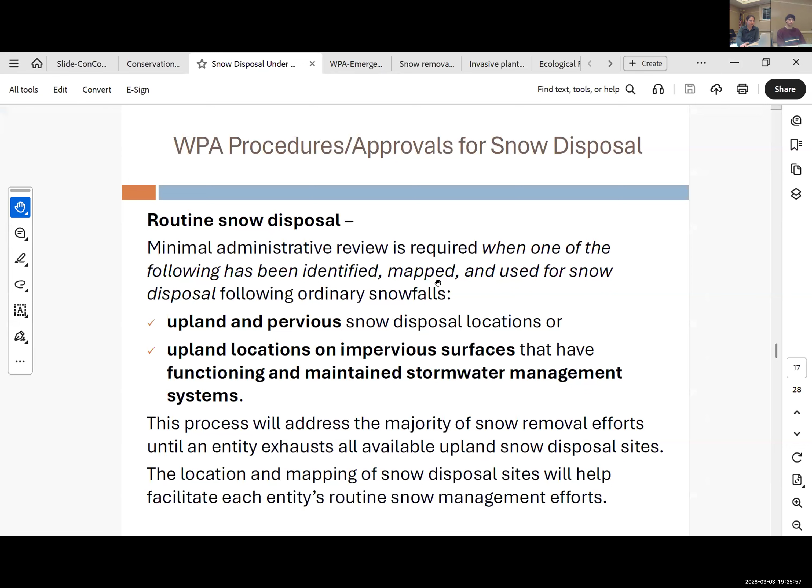Just for administrative awareness, I shared this in OpenGov, but I'm happy to share it via email to the commissioners going forward. DEP does have guidance about emergency certifications, specifically for snow removal. I think Kim and Andy just hit most of the points—basically exhausting upland storage and ensuring the snow is of the highest quality possible. The planning office intends to have the kinds of things we're discussing now written down, so the commission would have questions and answers, and facts, to refer to when making decisions. That document would be an attachment to the emergency certificate, updated as a living document going forward.

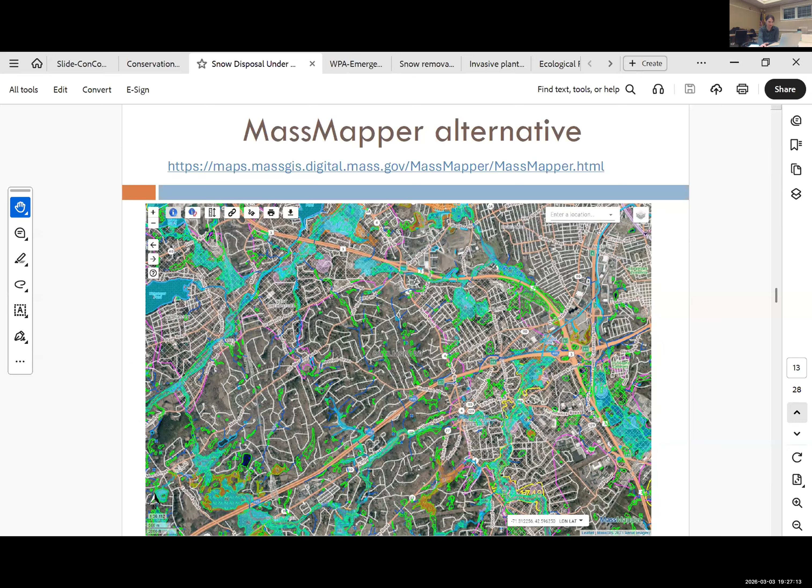Kim, one thing I forgot to ask you about earlier: I know DEP had brought up the issue of maybe needing an endangered species emergency authorization, or at least checking in with Mass Wildlife. Is there any update on that? I don't have an update tonight. My understanding from our initial back-and-forth emails was that there were no endangered species in that area, so it wasn't something I pursued further, but I'm happy to do that going forward.

I'm sorry, it didn't cross my mind until this evening when I was looking through some of this guidance, but I think that will be something we'll include in that ready-to-go package.

There are sturgeon up around there. I think in the future the process will include getting a sign off from Mass Wildlife of some kind, even if it's not strictly a MESA review, just kind of an awareness. That was something I forgot to bring up earlier today.

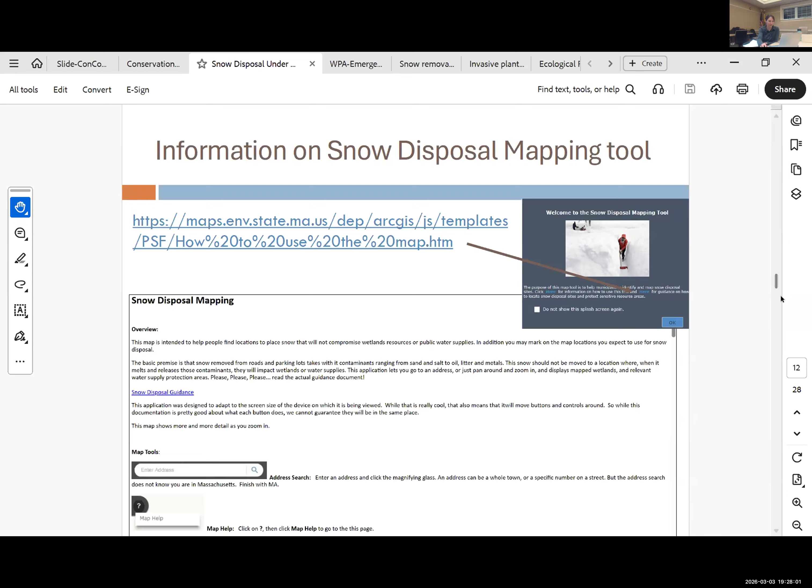So this section D is a standard state form for commissioners who haven't maybe seen this process before. The special conditions go here. What's happening is in my absence, Andy signed this certification form because I was away and because of the time urgency. It's valid only if the commission ratifies it, which is a simple majority vote. Once it's ratified, it's in effect for 30 days. In this case, the emergency is over, so it's definitely within that 30-day window for now. If 30 days passes and another snow emergency came up, hopefully not, it would require a new certificate. It's not like this lasts all season, it has a 30-day expiration date.

But the question before the commission now is whether you'd ratify this certification that was issued last week.

So I have one other question. Kim, is it in DPS's plans in the future to use that snow blower so that it's clean snow rather than scrapings, in future seasons? It's not a piece of machinery the city owns, it's something we contract out. But I know it worked really well this season with the sheer amount of snow we had, so I would imagine moving forward it would be something we'd be interested in contracting again.

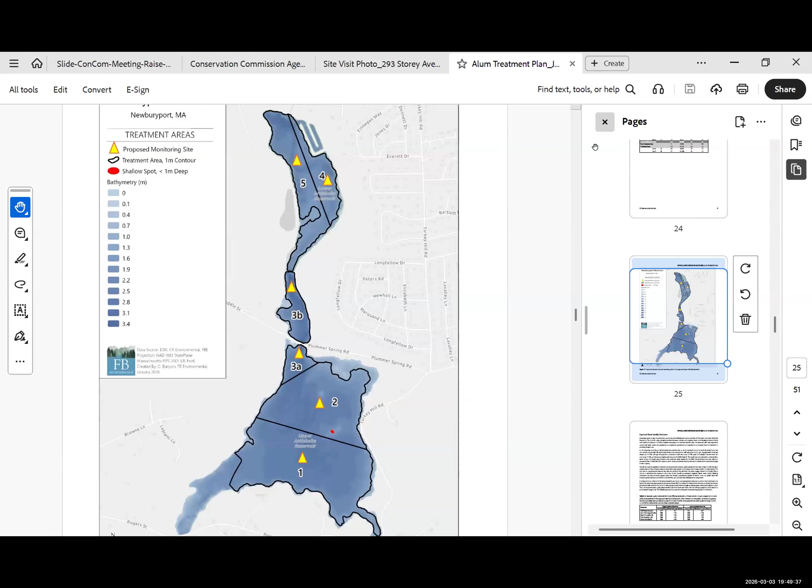Just to give you a sense of how we're planning to break the treatment up: there are 5 primary zones. Zone 3 has 2 parts because it's above and below Plummer Spring Bridge, so we have section 3A and 3B. They'll be treated with the same dose, but there are some logistics being sorted out with barge access between those two zones.

The treatment itself will still need to be negotiated a bit with the contractor selected, as far as how many days it will proceed. My proposed plan aims to maintain ecological integrity while managing what can realistically be done by the contractor and the equipment they have. It'll likely be around 10 days of total treatment over a 2-week period, aiming for the first two weeks of May this year.

That timing is pretty critical because these are shallow reservoirs with fairly dense aquatic vegetation that grows, and we want to apply this before the plants really start to reestablish for the season. This allows for good floc formation as the compounds are added, and rapid settling into the sediments.

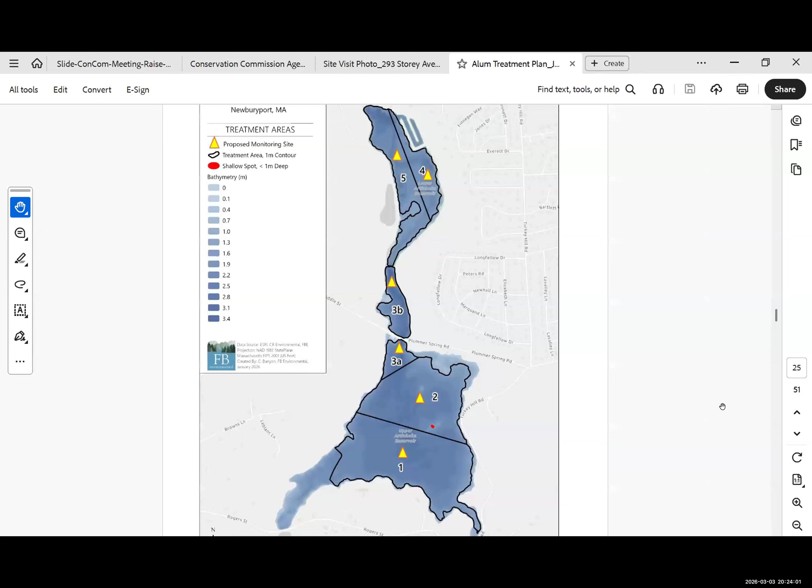So I lay out a fairly comprehensive monitoring plan in the plan, PDF page 36 Kelsey, since you're navigating to it. It's just a summary table. There's a narrative before that table that helps explain it. But in the map you saw earlier, there were yellow triangles on that map, and those are monitoring stations that will be utilized.

So we'll have a couple monitoring events before treatment, so we can establish a baseline at all of those sites. And then during the active treatment, which should occur over a 2-week period in May, city staff will be going out every morning to collect the parameters you see here. So it's basic water quality parameters.

The ones you see coded in pink are the ones that are directly affected because of the treatment itself, right? So the pH and turbidity, those are things that we're specifically looking for in the pH. We want to stay within a certain range during the active treatment.

So someone like myself, who's able to assess the safety of the treatment as proceeding, I will be out there making sure that the pH is maintaining itself during the treatment, and then we'll be collecting samples that are sent to a laboratory for the other parameters listed here, most especially the total aluminum, which we'll compare to EPA criteria, knowing that the first sample will likely exceed, but what we want to see is a very quick recovery of the system.

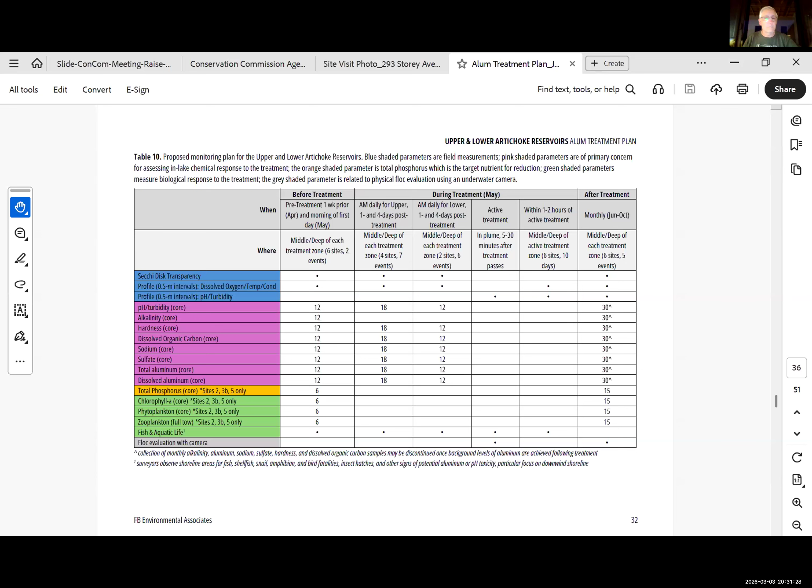All right, next item is 13 Hale Street, Sunil Shah, Palmer Capital Corp. Yeah, Joppa, they're both in the room here in person.

I'll hand it over quickly. I think several commission members have been to 13 Hale Street a month or two ago. They received an unrelated certificate of compliance. Now proposed is a battery energy storage system. We recently issued an RDA for a battery storage system at 23 Low Street. This is an unrelated project, but I bring that up because we have an idea of what the project looks like, and there are some wetlands on site, but I'll let you guys describe where that's going on, and I'll bring up the most recent site plan.

Thanks, Kelsey. Just to introduce myself, my name is Justine Fox. I'm a wetland scientist with Williams and Sparages LLC. We have Sunil Shah here as well from Palmer Corporation. I'll just wait till Kelsey gets the plan up.

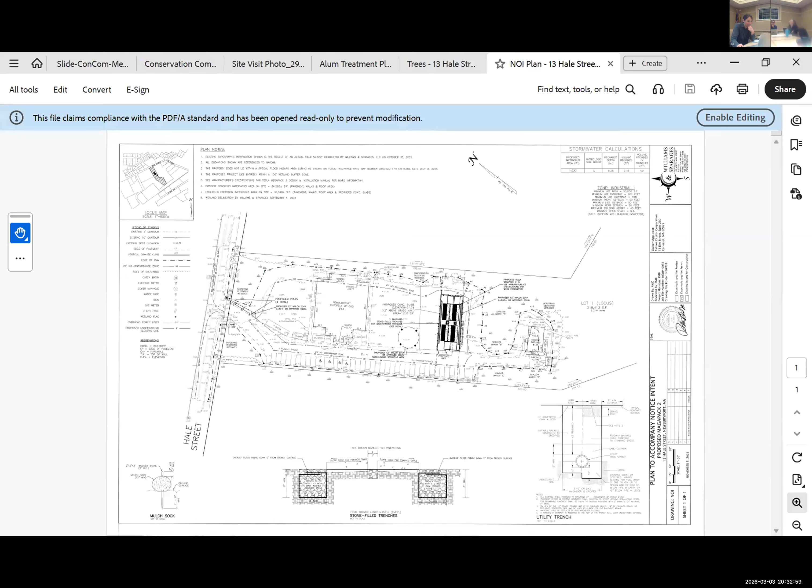Sure. So just to speak to the wetland resource areas in question, they pretty much surround the structures on this property. If you're familiar with site plans that were approved for this property in the past, there was not previously a wetland delineated on the western side of the property.

I did get some pretty obvious hydric soils in there, and looking at old plans from the site, that area was designed as a swale, so it makes sense that a wetland would have formed there over time as water moved towards the swale. There were also stormwater basins constructed that are labeled as shallow marsh B and shallow marsh A that have been delineated as wetland as part of this application. They've pretty much taken over with wetland vegetation at this point, which might be more obvious in the photos that Kelsey took at the prior site inspection.

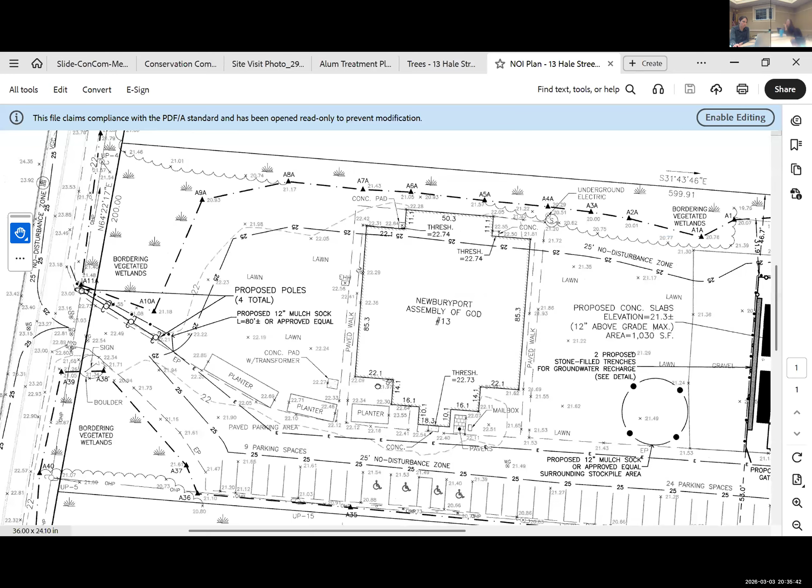No vegetation is proposed to be removed within the buffer zone for installation of the system. Underground electrical wires are proposed from the system, up the driveway in front of the church structure, and towards the entrance, where they will surface, and 4 new utility poles are proposed adjacent to the wetland resource areas near the entrance to the site before they join existing infrastructure in Hale Street.

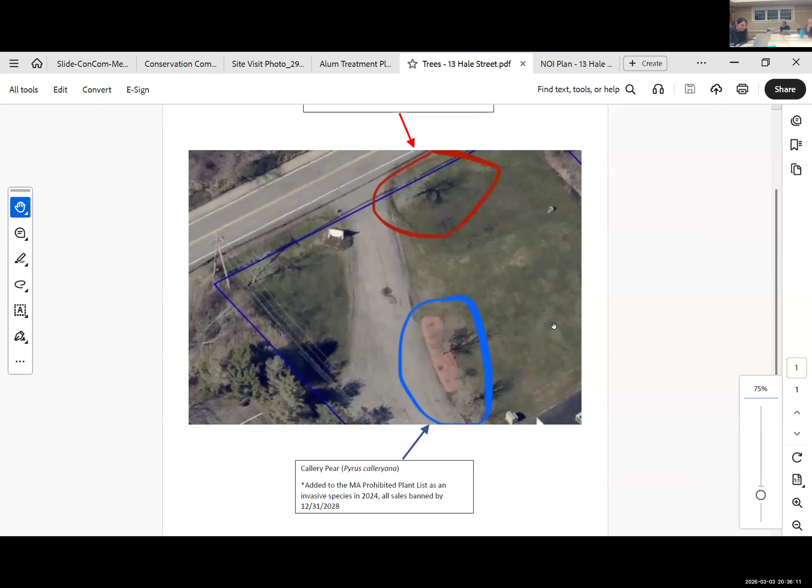The only vegetation we were potentially concerned about was a tree that I circled in red near the street. That's where the overhead wires will be, no longer underground, and potentially impacting the branches on that tree. I identified this tree as a green ash tree, and unfortunately there was evidence of the invasive emerald ash borer in the canopy already, which is typically fatal for this type of tree within a few years of initial infestation. So chances are this tree will continue to decline anyways, and that is the only wetland vegetation we would be concerned about potentially disrupting as part of this proposal.

So currently the electrical is underground? We're proposing underground electrical coming from the system, and then there's existing infrastructure above ground in Hale Street that it would be connecting to.

So currently going to the church, there are no poles. Or are there? There are poles on the west side of the property. You can kind of see it a little bit, right there. So why not use those poles? Those poles are not adequately sized, and the wires are not adequately sized. We need to tie into the wires in the street.

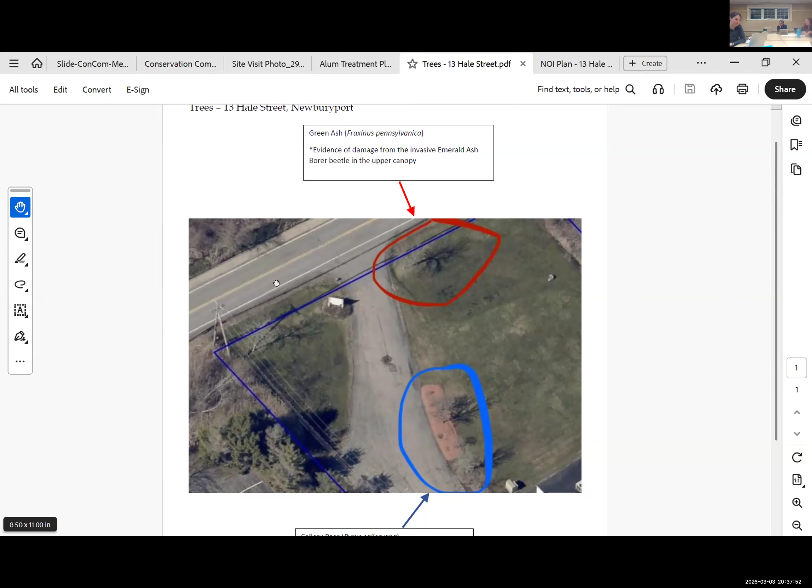As of this afternoon, we do have a DEP file number. And the planning board had the stormwater report go to peer review, and we got response back from Phil Christensen, who agreed that the project as designed will not have any measurable stormwater impact on the surrounding area.

The planning board also had a condition for maintaining the system, that the gravel perimeter around the system shall be clear of vegetation and other obstructions at all times, and access to the site and the system, including the fire department turnaround, shall be kept clear of snow and vehicles, and no parking signs shall be posted in these areas. We don't have that shown on the plan currently, but that's a condition the planning board required.

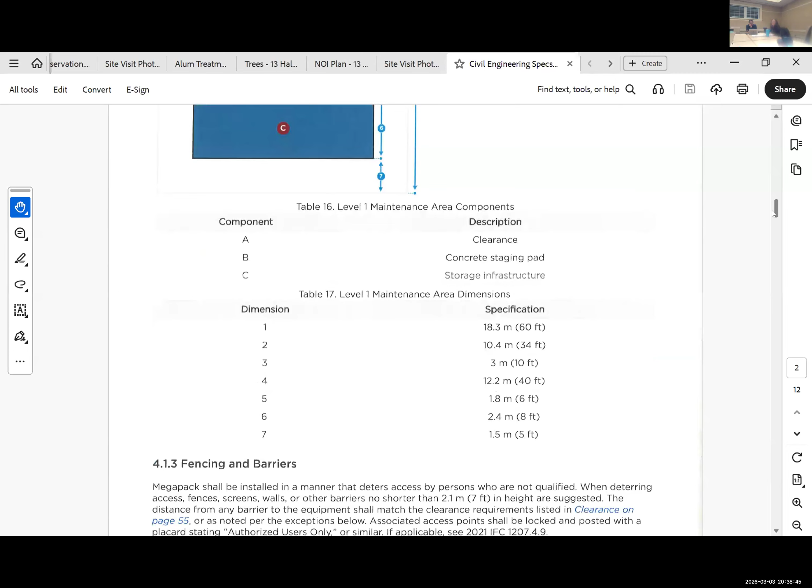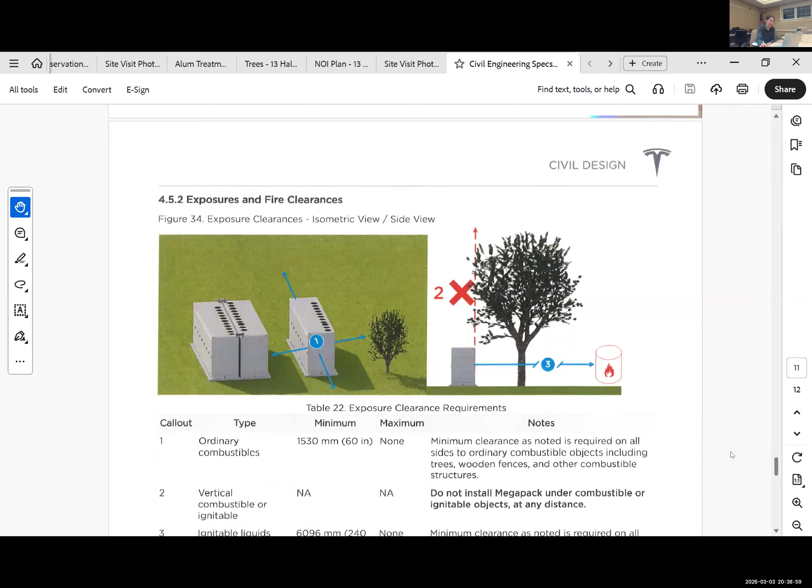I was just going to bring up, I don't know if everyone got a chance to read the civil engineering report, it's not completely wetlands related, but it goes through more of the specifications of what the battery packs actually look like. Are they maybe the size of a shipping container each unit? Exactly.

If we go back to the plan - so the underground electrical looks like it's in the 25-foot no disturb zone. It is for portions of the site near there, not where it comes out of the system. The whole thing is proposed within the buffer zone, as the whole property is within the 100-foot buffer zone to the bordering vegetated wetlands that surround it.

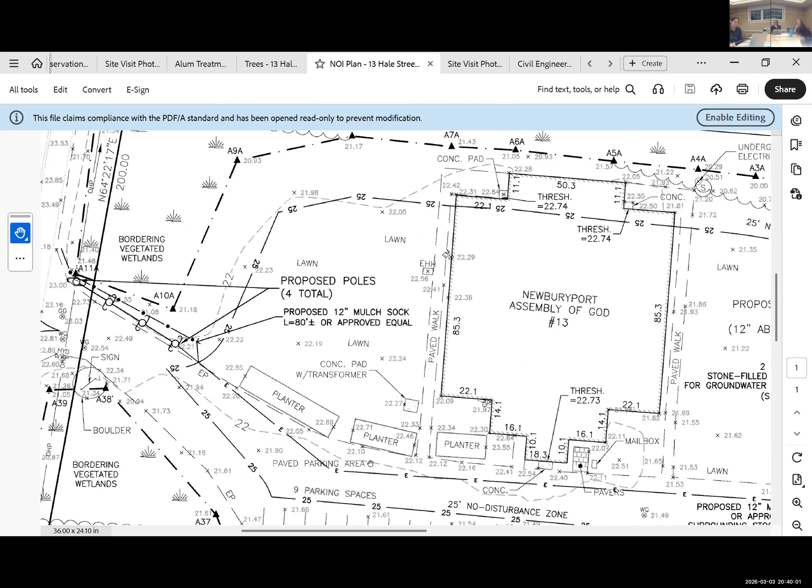But if you see on the west side of the system, there's a line with an E in the middle of the dashes, that is the proposed underground electrical wires. It's outside of the 25 until you get towards the property's frontage with Hale Street, where unfortunately there was no option outside of the 25-foot no disturbance zone. So we just did our best to try and keep it out of the wetland resource areas themselves on that side of the property.

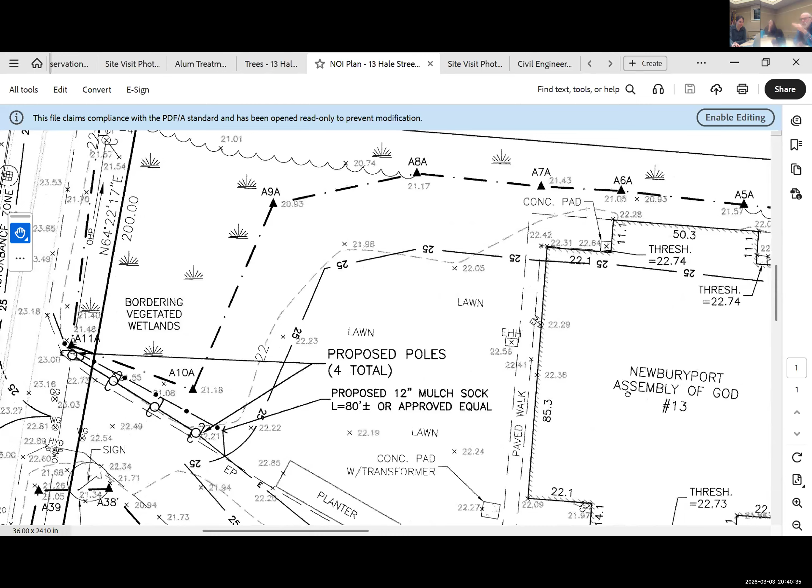This is where the intersection happens. I don't exactly see where the underground is. It's small on the screen, but the line with the capital E's, that's where the underground is proposed. There's a note to go up to the other side - towards the battery? No, just directly north. There's a note there that says underground electric. Oh, that's existing infrastructure.

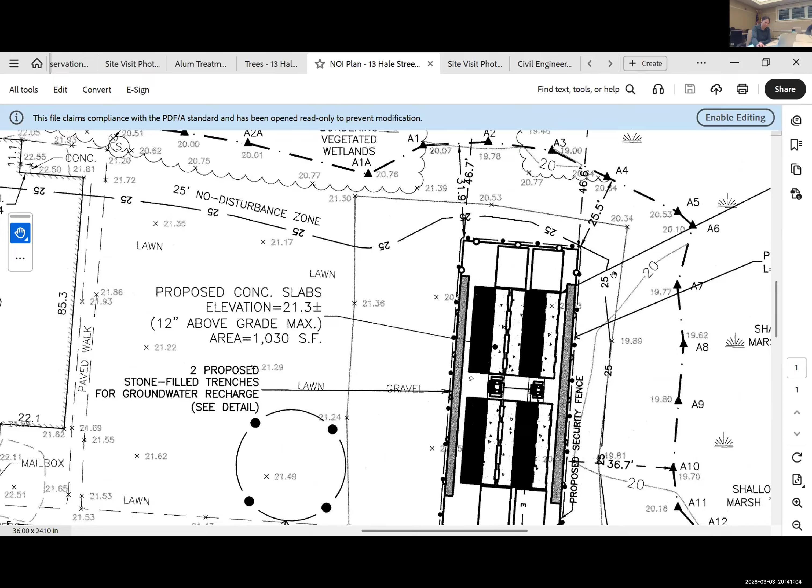I think this is the shortest distance between the battery units and the actual wetland boundary, and it's just over 25 feet. So it's outside of that 25 foot. Okay, so let's go down and follow the underground electric.

Which line is that? This one, with the E's in it. Okay, let's follow it all the way to the poles. Still underground in front of the church. Now we're in the driveway, and there are 4 circles to the east of the entrance drive, where it will surface. The 4 proposed utility poles are along the entrance driveway before it connects with the existing infrastructure in Hale Street.

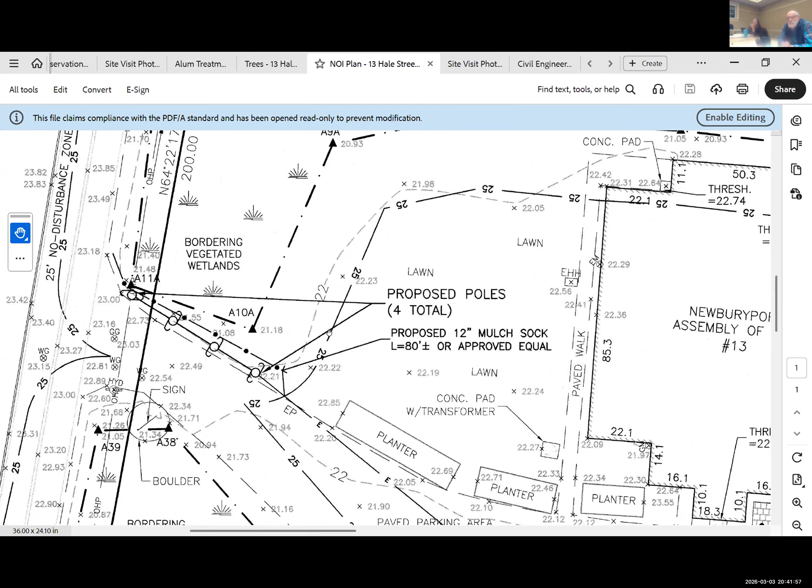So those are in the wetlands, or certainly within the 25-foot no-disturb zone. That's correct, the poles themselves. We did our best to keep them out of the wetland resource area, but unfortunately it borders the driveway on both sides, and there wasn't a feasible location outside of the 25-foot zone for those poles.

So typically, if you're doing work in the 25-foot no-disturb zone, we would ask you to apply for a variance. Admittedly this is fairly minor, but that is our procedure. We haven't submitted that as a thing yet. That is generally what we would do.

And there's certainly, I would think, a public interest in this as well, having a battery pack sitting there for electrical service. But what do others think?

Yeah, I think we need to follow our process and have you apply for a variance, otherwise we get in trouble for not doing that. Understood, yeah, we'd have to issue a variance in this case. Because it does impact the 25-foot no-disturb, but it is minimal impact and there is public interest, so it should be straightforward, be the problem.

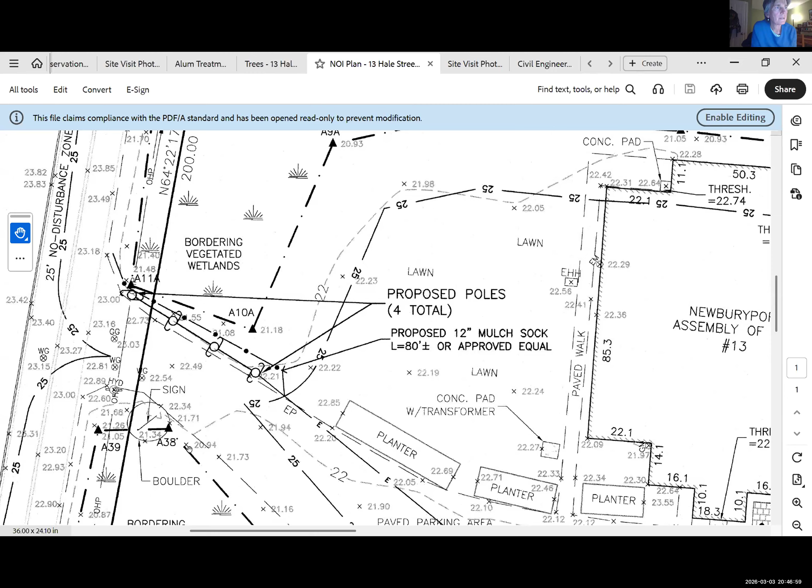So I guess, is there any more questions while we have this in front of us today? Yeah, I had a question - could you actually move over to the actual pad, Kelsey? Sure, yeah. So just a couple questions for constructing the pad.

Do you need to do any dewatering? And if so, how would you manage the water in the excavation itself? Also, what are these two proposed stone-filled trenches for groundwater recharge? What is that for?

Simul can speak more to the design of the system itself, but to my knowledge it's just placed on top of concrete pads, and there's not a lot of ground disturbance with the system itself. The trenches on either side - the concrete pads are going to be pitched slightly towards those. So any stormwater that lands on the system will go into those trenches, and the crushed stone in the trenches will infiltrate that water or slow it down, so it won't stand around the system or run off immediately into the nearby wetland resource areas.

Okay, so this is really like a slab on grade, and you're not going into the ground. That's right.

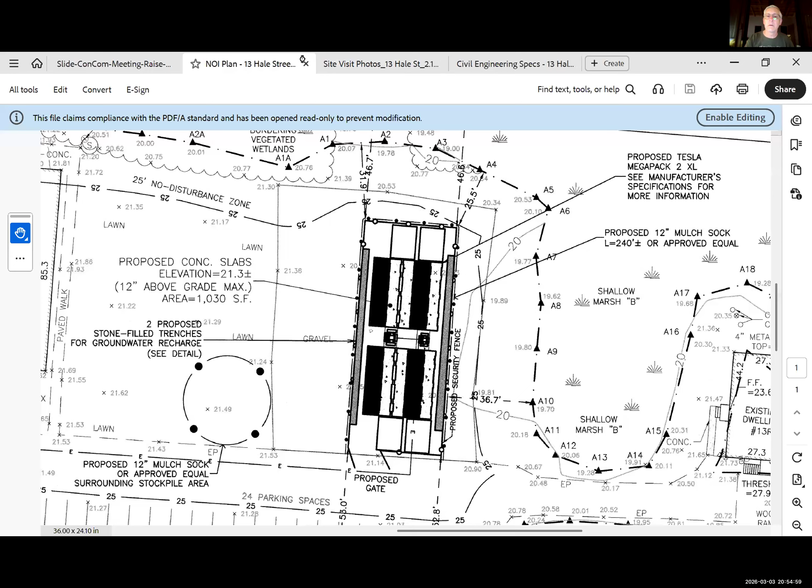So I believe we have Josh on Zoom. Just before tonight's meeting started, Scott and Stone did submit a new document, so I'm going to bring that up. But they're aware that neither myself or the commission has had the chance to review it yet.

Yeah, I'm here, Kelsey. This is Josh. Hi, Josh. Thanks. These were the follow-up requests the commission had made at the last meeting, and I sent them to Josh and Prince via email late last week.

Yep. Yeah, happy to talk through any of these things. In general, we just tried to answer your questions and concerns from last time, in enough detail and hopefully with enough clarity that it's clear what contingency plans we have in different circumstances.

Okay. We could go over this now. I don't know, how long is the document? It's a couple pages. Okay, it's just a couple pages. Okay.

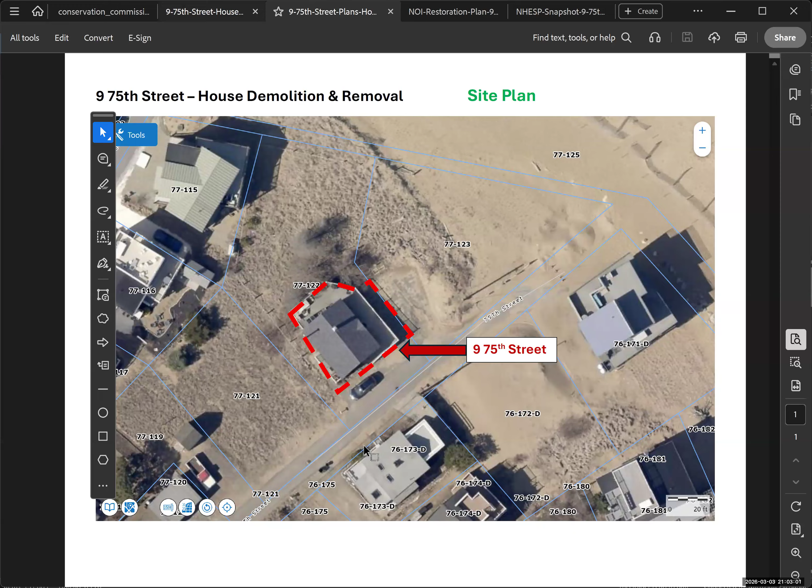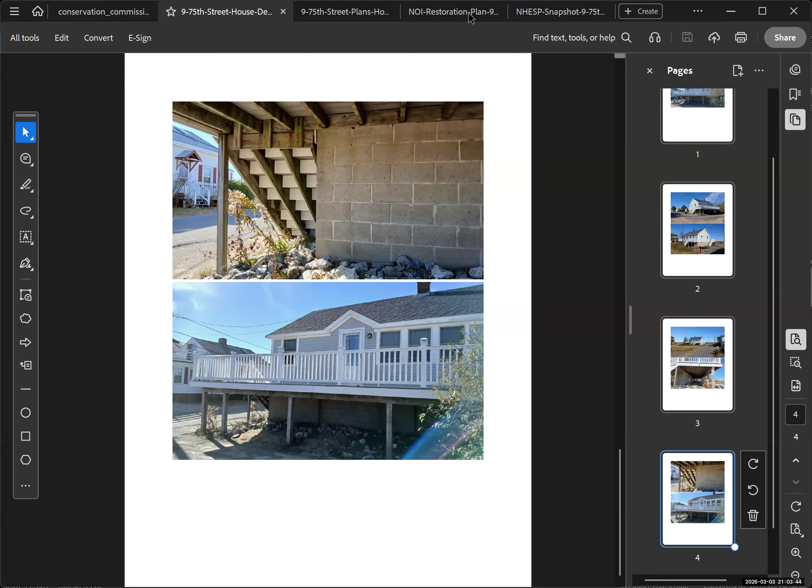There's a couple of photographs here of the house, but just to give you an idea, it's a sort of a cabin that's up on top of CMU block walls that form what's essentially an above-ground basement. So you walk in here, you're in the basement level that's above grade, CMU block walls, and they just have this cabin on top of it. This is the only house left after the original three to be demolished. We've purchased this property, we have to demolish the house. The homeowner's been moved, but we're trying to coordinate with a variety of things like utility company disconnects and verifications. Basically, this is the house that would be coming down, and essentially what happens is it gets restored to dune grass and natural environment.

So I just blocked off the other few houses that were not part of this work here, they dropped out of the program, so to speak. I wanted to let you know about that because it's coming along pretty quickly based on the multiple constraints we have on this project. But if you have any questions, let me know. I think some of you are already familiar with this particular project from a prior dialogue or two.

So, Andy, did you get the approvals to move forward with the demolition? We got approvals to go ahead, however they're being difficult on the time frame. We're trying to walk delicately there because of the difficulties. Some of the MEMA folks are a little concerned because of changes at the federal government level, and I imagine this has something to do with whether they would look favorably on Massachusetts or something, but they don't necessarily want to tinker with prior approvals too much. So we're trying to just follow along with as best we can what they're expecting us to do.

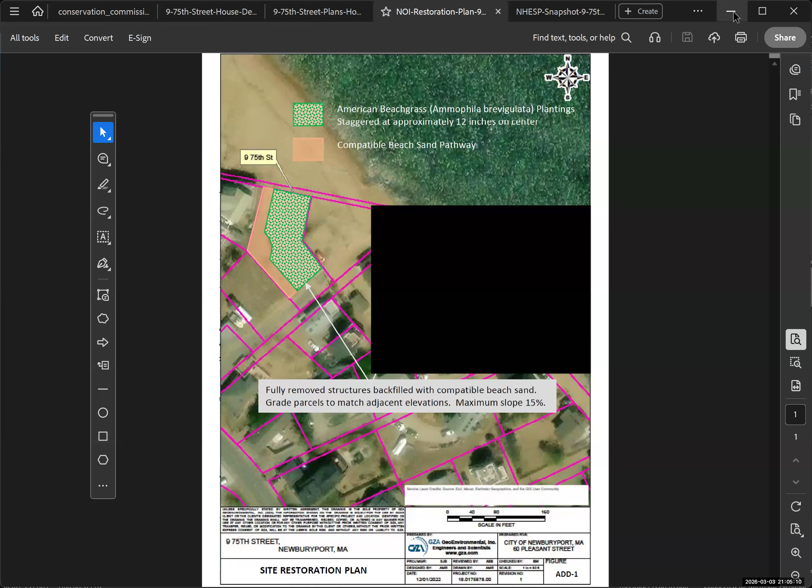Anyway, Kelsey and I will circle back, we're going to talk about this tomorrow morning. We'll circle back with you, but it's a relatively straightforward project. The house demolition itself, after they do a couple of interior removal disconnect type things, is only expected to take about a day or two, including removal of the material from the site, because you can wreck it pretty quickly. At any rate, that's the scope of the project.

During this past storm, the last bomb cyclone we had about a week and a half ago, or last Monday, how did Plum Island fare? I haven't been out there to see the area.

Around that area at the end of 75th, you could see the water getting up high on the water side, but not necessarily coming over the top. I think there's probably still some of those geo bags buried underneath. Between the fences that are there, they seem to be doing a good job collecting sand. I do think it'd help to plant more dune grasses. But it looked okay to me—there was an expanse of beach, not a sharp slope or anything like that.

Good, that's great to know. Okay, thank you, Andy. We will be looking forward to that.

Do we have anything else? Yeah, I sent Kelsey an email, which you may have missed, about who could vote and not vote on 5 Basin Street. Do we actually have a quorum of people who attended enough meetings, since Reese can't vote on it?